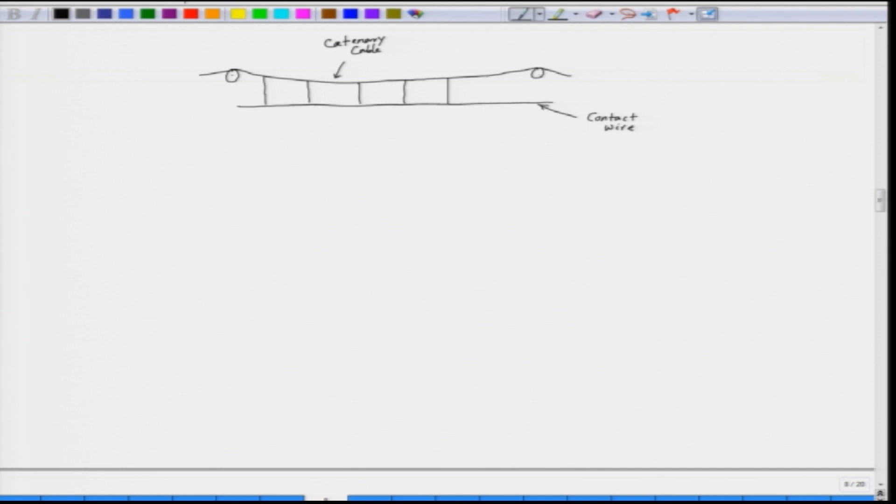So, we have the catenary cables like this, and this is the catenary line which is called the catenary cable, and then we have a contact wire with which the locomotive makes contact. This is called the contact wire. The contact wire is kept almost horizontal by the dropper wires. So, these are the dropper wires. So, we have the droppers here.

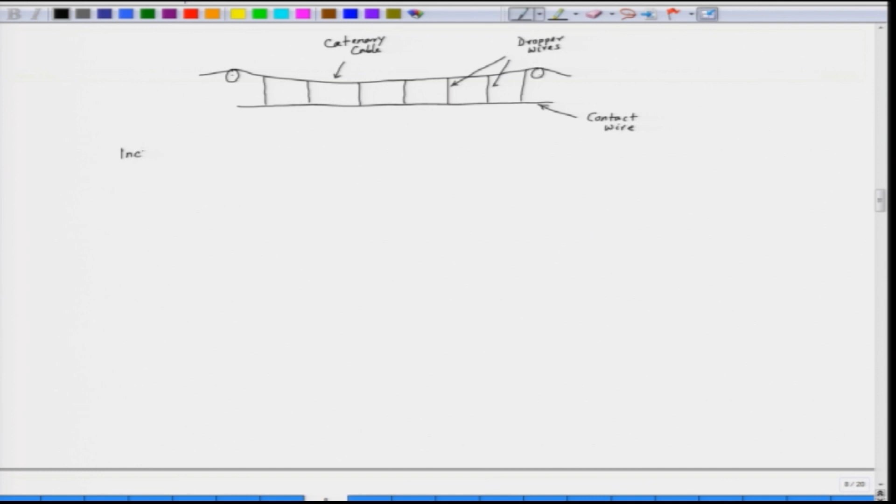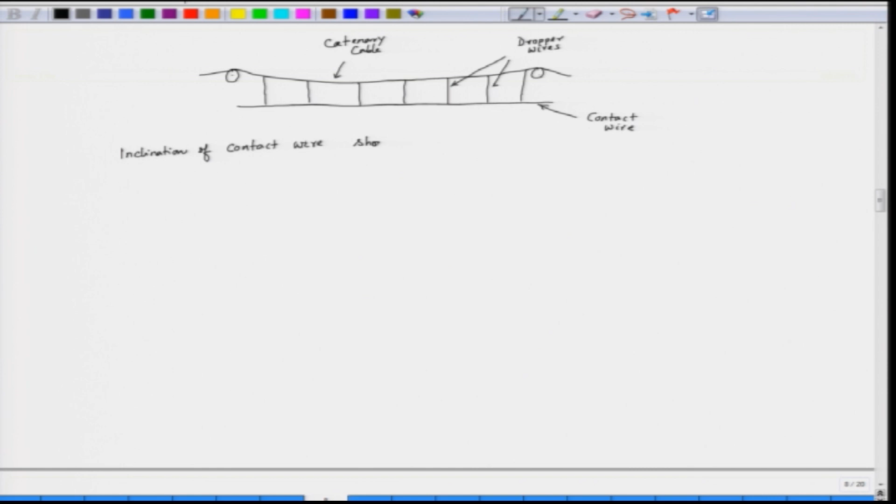And the contact wire should be horizontal, and the inclination of the contact wire should be less than 1 in 300. So, this has to be absolutely horizontal. So, the catenary wire basically gives it a mechanical support, and the contact wire is kept horizontal by dropper wires which are connected to the catenary cable.

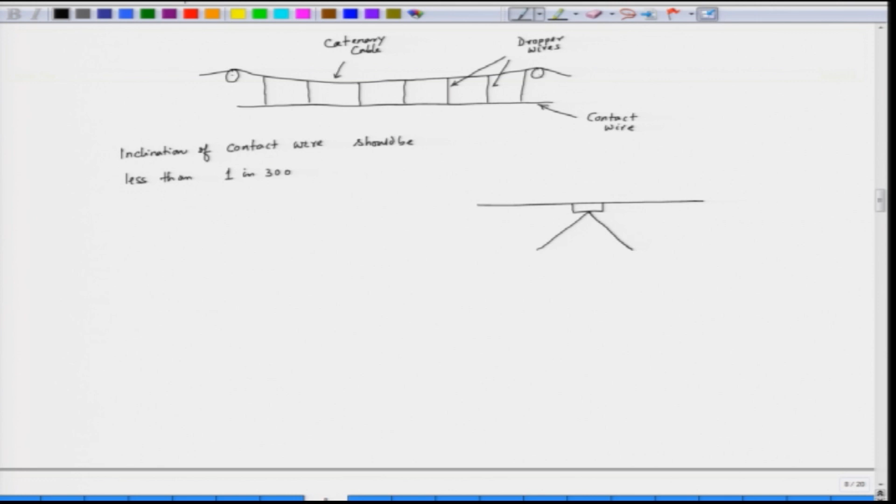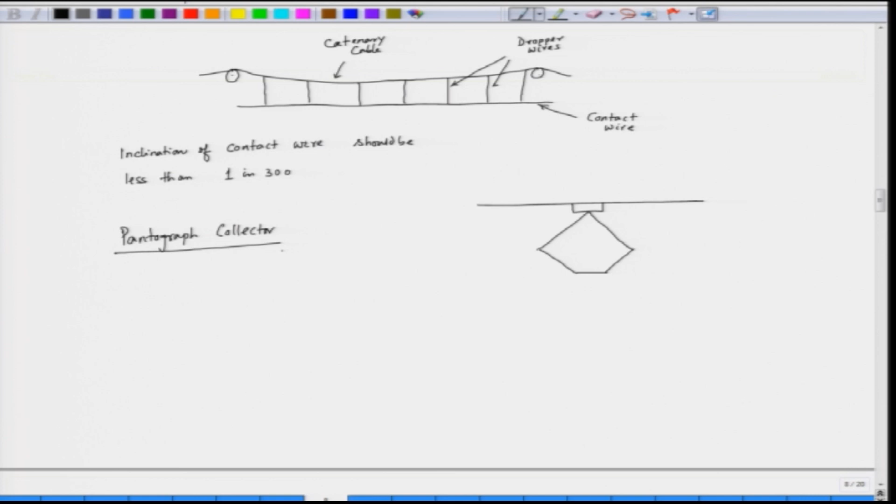Now, the train or the locomotive makes contact with the contact wire through an equipment called pantograph. So, we have a pantograph or a pantograph collector. So, this is a pantograph collector. It is something like a pentagon. This is a pantograph collector. So, this is a collector strip, and this is the contact wire.

And the contact wire is not at a particular position, it is staggered to even out the wear of the contact strips. As the train moves, the contact wire is also staggered, so that the wear of the contact strip is almost even.

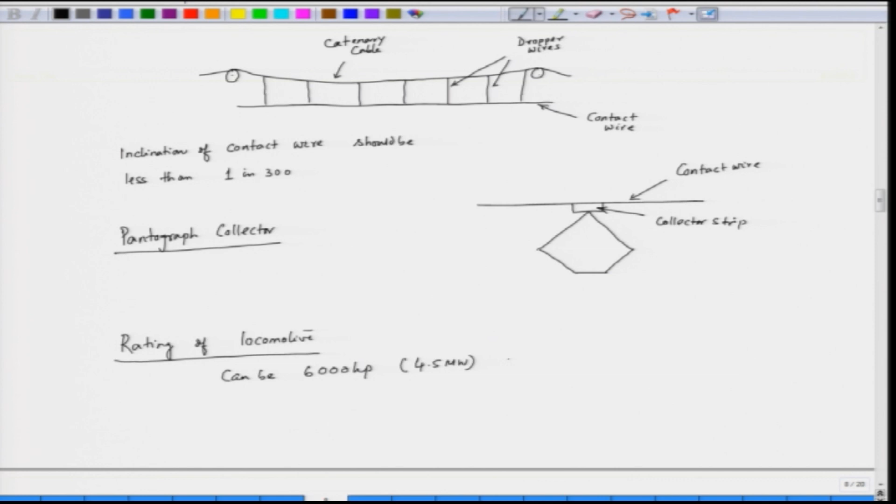So, this is how the current is collected. And when we talk about the rating of the traction drive, it can be as high as 6000 HP, which means approximately 4.5 megawatt or more. So, we are talking about a high power drive, and this power is not supplied by a single motor. This power is supplied by a combination of motors, maybe 4, 6 and so on. These motors drive the axles, which are connected to the wheels.

So, let us see how the motors drive the axles. So, we have the axles here, these are the wheels, and we have the axle, and each axle is connected to 2 wheels. These are the wheels, and they run on a predefined track. So, we have the track here on which the train runs, and the motor usually sits on the axle. So, we have the motor here, it basically sits on the axle. Each axle has got one motor,

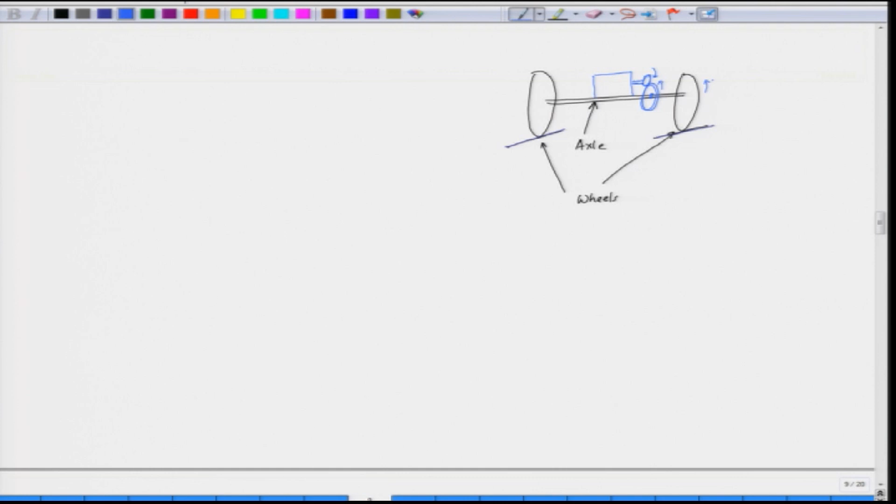and then we have a gear arrangement. We have a gear here, and then we have a gear in the axle. So, these are the fixed gears in this case. This gear is connected to the axle, and as the motor rotates, the gear also rotates, and hence the wheel rotates. So, this is the motor which is mounted on the axle, and we have the gears. The gear is driven by the motor, and the axle rotates, and hence the wheel rotates.

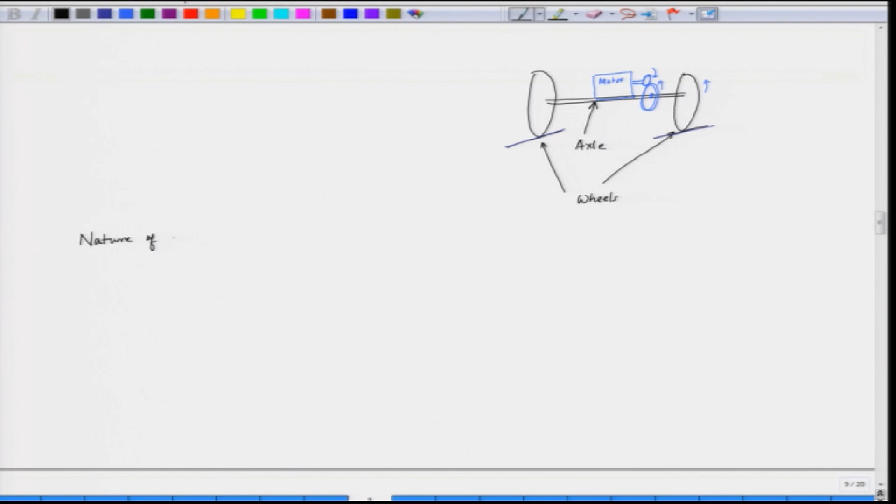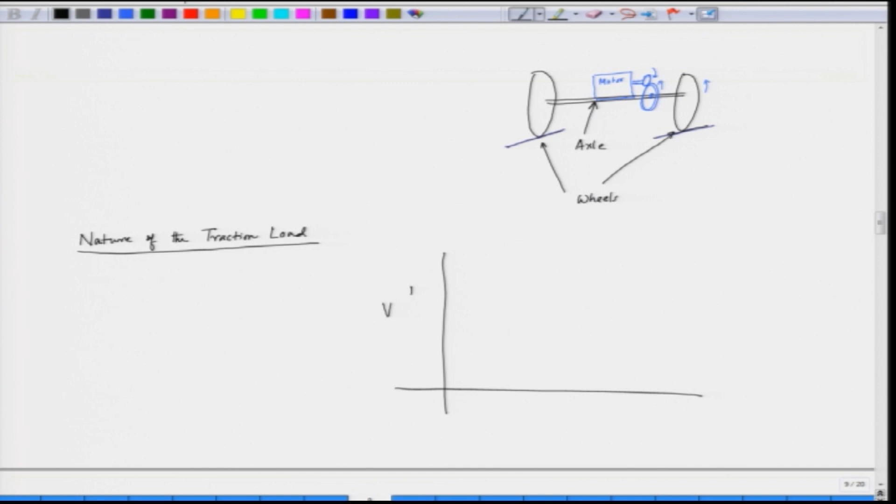So, what about the nature of the traction load? We will now discuss the nature of the traction load. Now, the traction load consists of various components. Typically, the variation of the load with speed looks like this. So, this is the speed in this case, and we have the traction load. This is called the train resistance. So, this looks like this, and we have the various components.

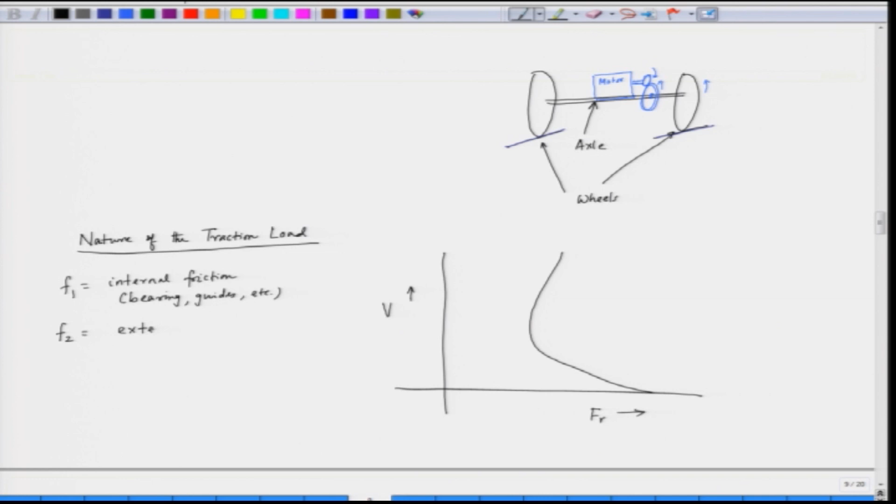F1 is called the internal friction, which is with the bearings, guides, etc. F2 is called the external friction, which is the wheel flanges and rail, and F3 is the air friction. So, the train resistance Fr is given by F1 plus F2 plus F3.

So, when the train is moving, we have internal friction. The internal friction is with bearings, etc. And we also have external friction, which is with the wheel and the track. And then we also have air friction, because the train is moving at a certain velocity and is basically facing the air. So, the air is also offering a resistance to the movement. So, primarily these are three components: the internal friction, external friction, and the air friction.

In addition to that, there is a gravitational force which may be acting if the track is having some gradient. If the track is absolutely horizontal, there is no gradient force, but sometimes when the locomotive is moving in a hilly area, there may be an up gradient or a down gradient. Depending upon the gradient of the track, there would be a gravitational force.

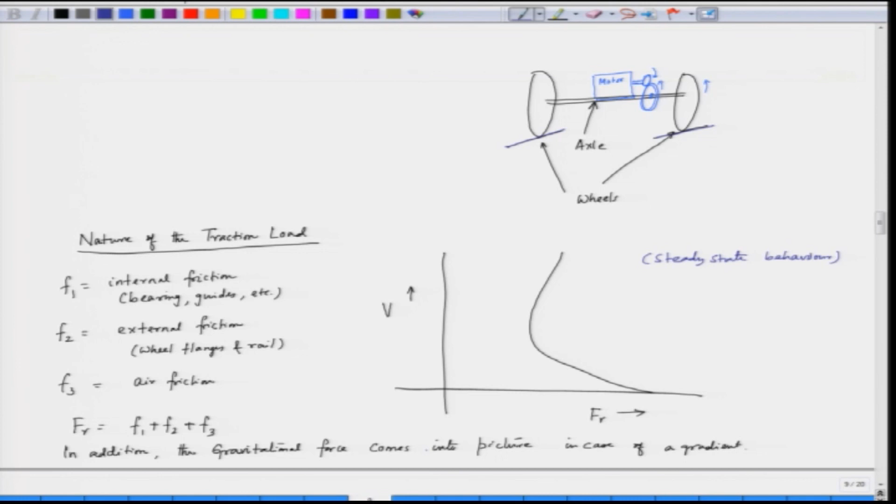Now, there is an important parameter which is associated with traction. When the wheel is running on the track, there has to be an adhesion between the track and the wheel. Unless there is adhesion, the train cannot move forward. Because there is adhesion, when the wheel is rotated by the motor, the train moves forward. The adhesion can be said in a crude word like a friction, but in electric traction we call this adhesion, and we have a parameter called coefficient of adhesion. Let us see what is coefficient of adhesion.

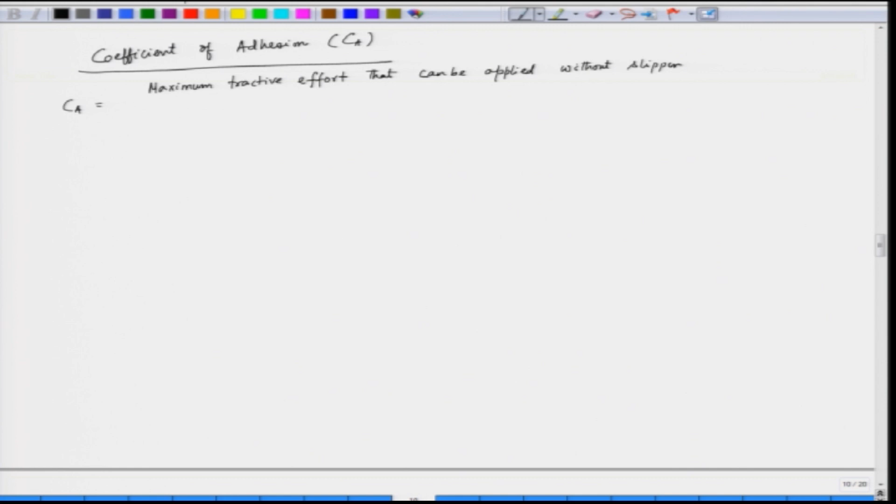So, we have coefficient of adhesion, which is called Ca. So, what is this coefficient of adhesion? The definition is the maximum tractive effort that can be applied without slipping of the wheel, divided by the weight on the driving wheel.

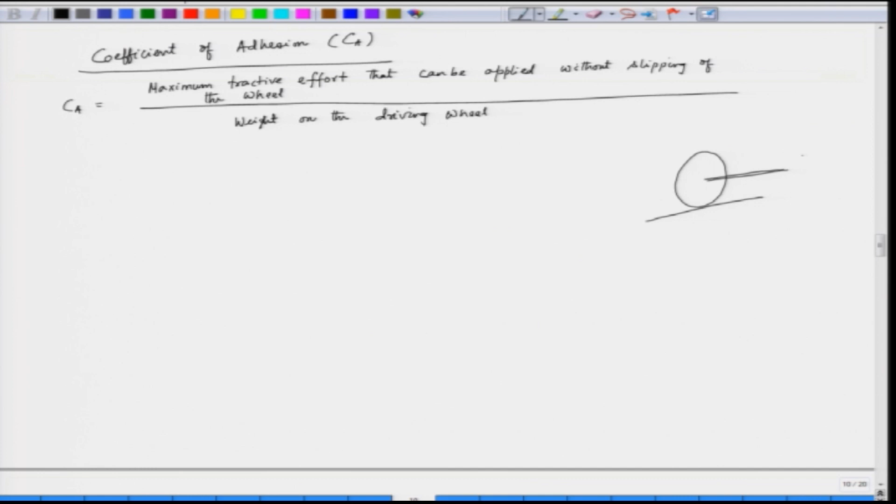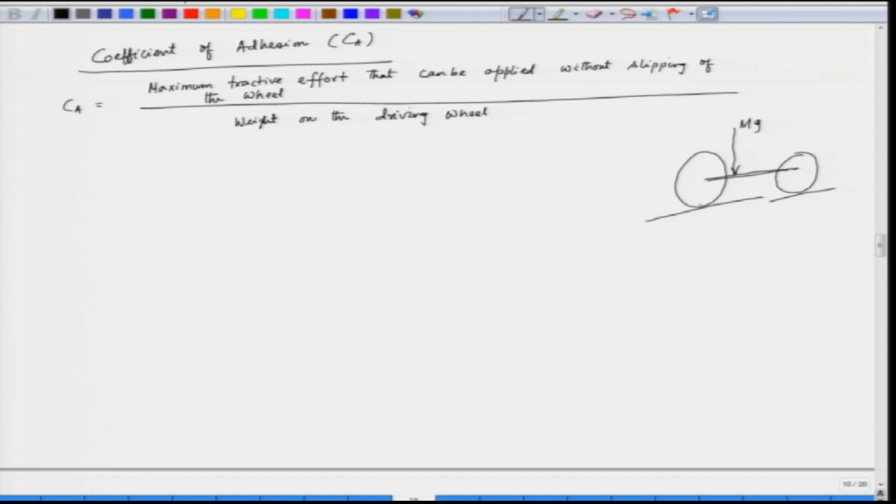So, we have the wheel which is resting on a track, and the wheel is basically connected to another wheel through an axle, on another track. So, we have some weight on this wheel. We have some mass, and m into g is the weight. This weight is distributed between these two wheels, and when the wheel is rotating, it has to move forward.

So, the definition of coefficient of adhesion is the maximum tractive effort that can be applied without slipping of the wheel. The tractive effort is the force which can be applied here without slipping of the wheel, divided by weight on the driving wheel. The tractive effort is being applied by the motor. The motor is producing a torque, and the torque by the radius of the wheel is the tractive effort. So, the tractive effort is Ft, which is the torque divided by the radius.

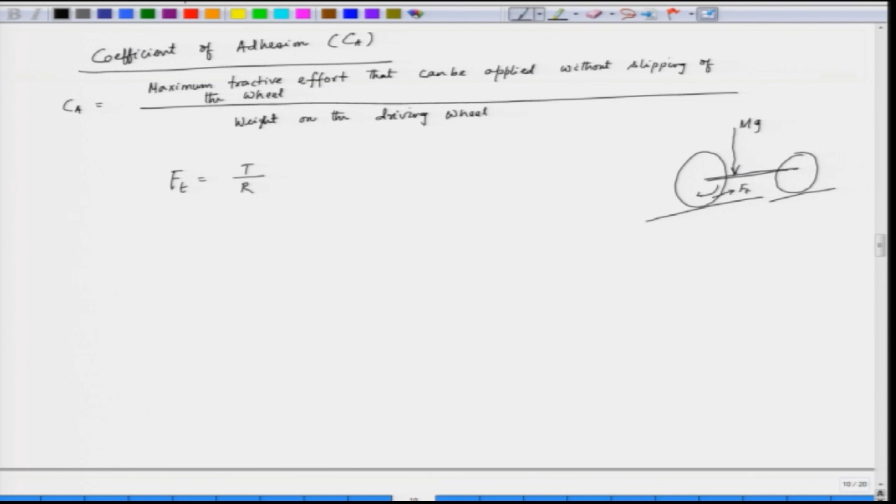So, we are applying a tractive effort Ft so that the vehicle moves forward, and if the tractive effort is more, the wheel may start slipping, and if the wheel slips on the track, there will be burning of the track, wear and tear of the track and the wheel. The wheel will be damaged, the track will also be damaged, because the wheel rotates at a high speed and it is slipping on the track. So, the track will be worn out. To prevent that, we have to ensure that the tractive effort applied is less than the permissible value, and that is decided by the coefficient of adhesion, defined here.

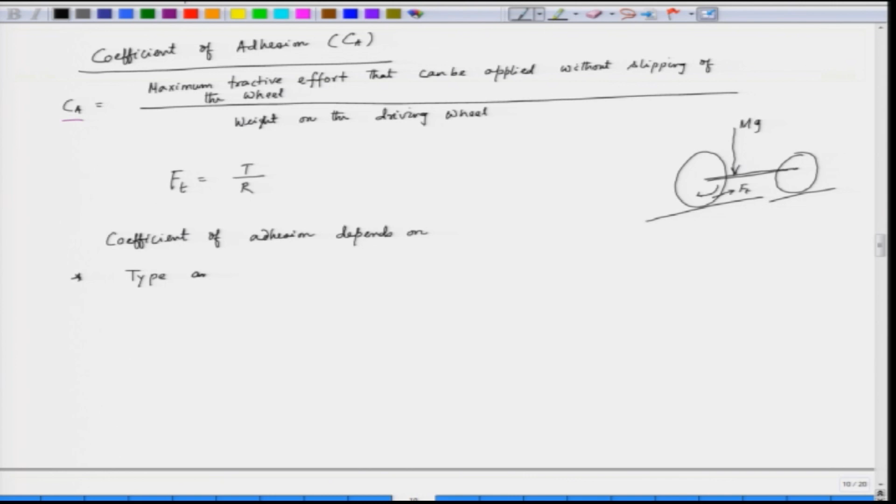Now, this depends upon various parameters. The coefficient of adhesion depends on, number 1, type and condition of surfaces at the point of contact. So, the coefficient of adhesion depends on the type and condition of surfaces at the point of contact. So, we have contact here and contact here.

So, it means whether there is presence of oil, grease; these will reduce the coefficient of adhesion. The presence of water on the track will also reduce the coefficient of adhesion. The presence of snow will also reduce it, and so on. So, if we are running the train on a rainy day, the coefficient of adhesion will be less. If the track has got oil or grease, it becomes slippery. The coefficient of adhesion, which is something very close to the coefficient of friction, also becomes less. So, the condition of the track and the wheel determine the coefficient of adhesion. Furthermore, the coefficient of adhesion also depends on the vehicle speed.

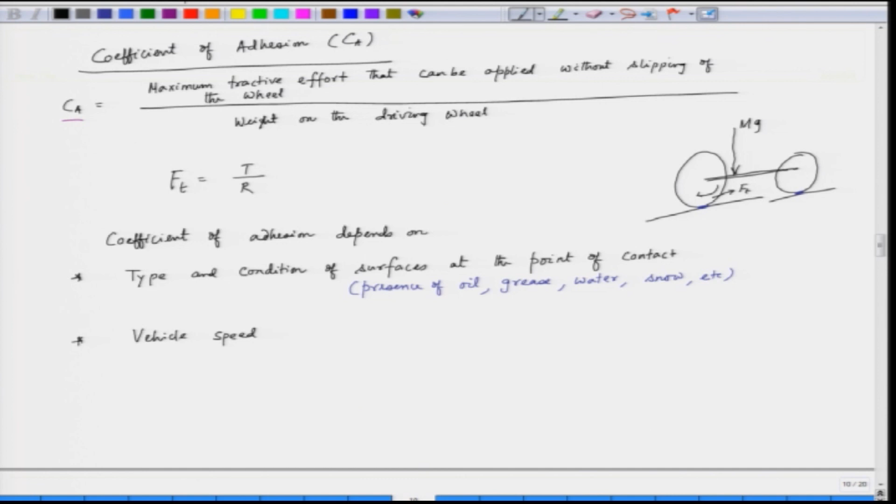Vehicle speed. If the vehicle speed is high, the coefficient of adhesion is less. If the vehicle speed is low, the coefficient of adhesion is more. So, if we plot a graph between the vehicle speed, V is the speed of the vehicle, versus the coefficient of adhesion, it will basically look like this. So, at high speed the coefficient of adhesion is less, and at low speed the coefficient of adhesion is more.

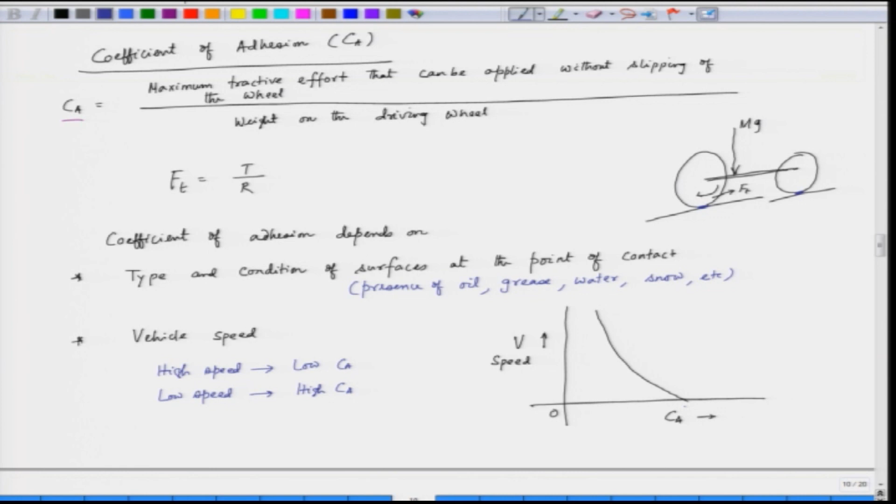So, high speed indicates low CA, low speed indicates relatively higher CA. So, if the speed is low, the coefficient of adhesion is high. So, this is how the coefficient of adhesion varies with the vehicle speed. It also depends on other parameters like the nature of the torque speed characteristic.

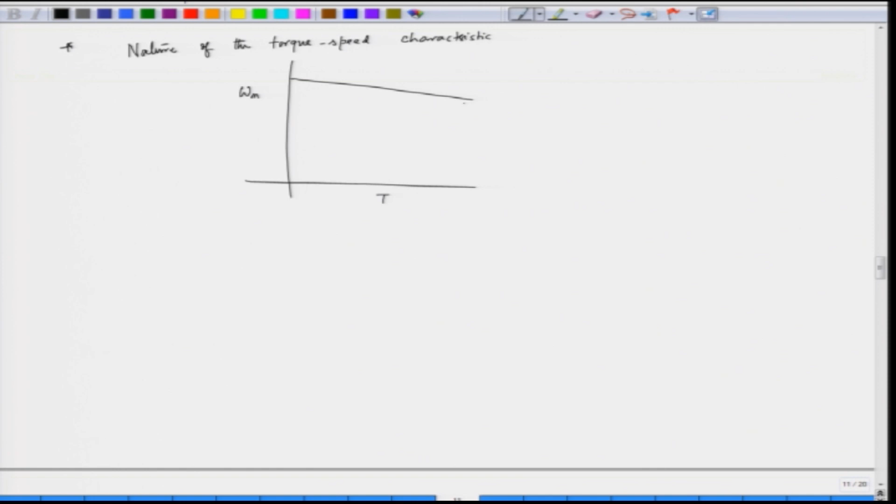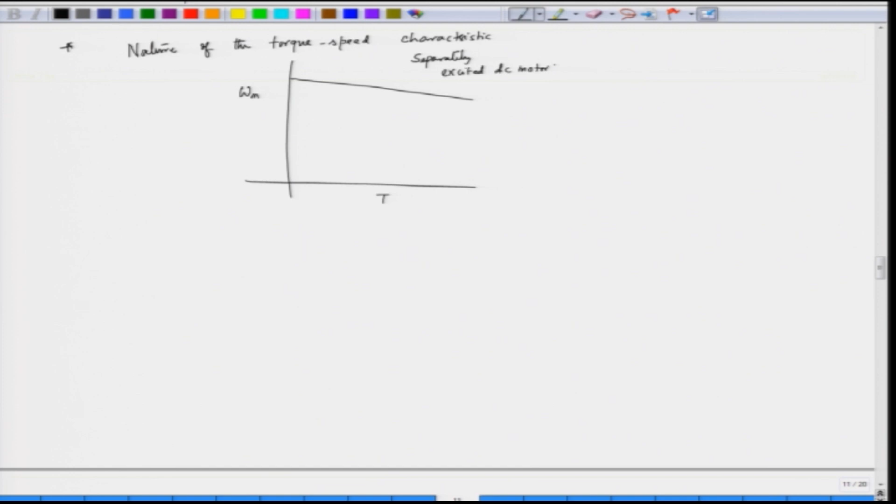So, let us say that we have two types of motor. One is a motor where the speed regulation is very small, so the speed is only dropping gradually with torque. This is basically a separately excited DC motor. And we also have another motor where the speed torque characteristic is not that stiff, something like this. We have a series motor, let us say, series DC motor.

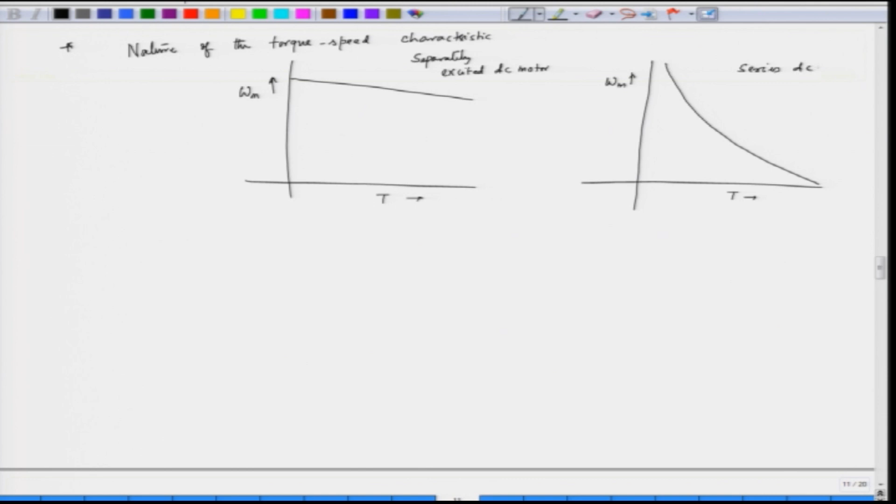Now, in the first case, when we have a separately excited DC motor, if the wheel slips, the torque reduces very quickly. So, when the torque reduces quickly, the wheel regains the grip on the track. So, this will have a higher coefficient of adhesion. So, here for a small change in the speed, when there is a wheel slip, the speed increases, but the torque change is quite significant.

When there is a wheel slip here, suppose it was operating at this point and the wheel is slipping, the speed will increase from point A to point B. When it increases to point B, the torque decreases from Ta to Tb. When the torque decreases, the tractive effort also decreases. So, the wheel regains its hold on the track and the wheel slippage is prevented. So, this has got higher coefficient of adhesion.

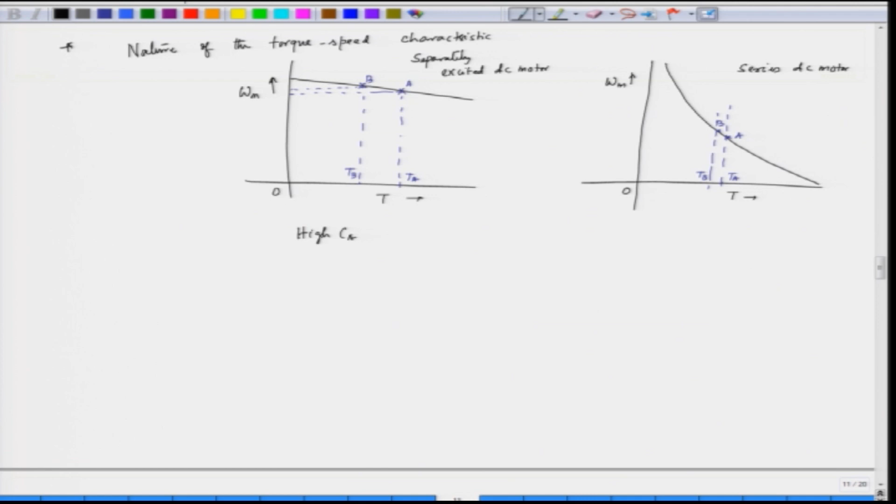But on the other hand, if we have a series motor and there is a wheel slippage, the speed increases from, let us say, A to B, but the decrease in the torque is not that high compared to a shunt or separately excited DC motor. For a series motor, the coefficient of adhesion is less. So, this has got high Ca and this will lead to a low Ca if you go for a DC series motor as a traction motor.

And we have another factor which also determines Ca, which is the motor connection. If the motors are connected in series, series connection will lead to a low CA, and parallel connection will lead to higher CA.

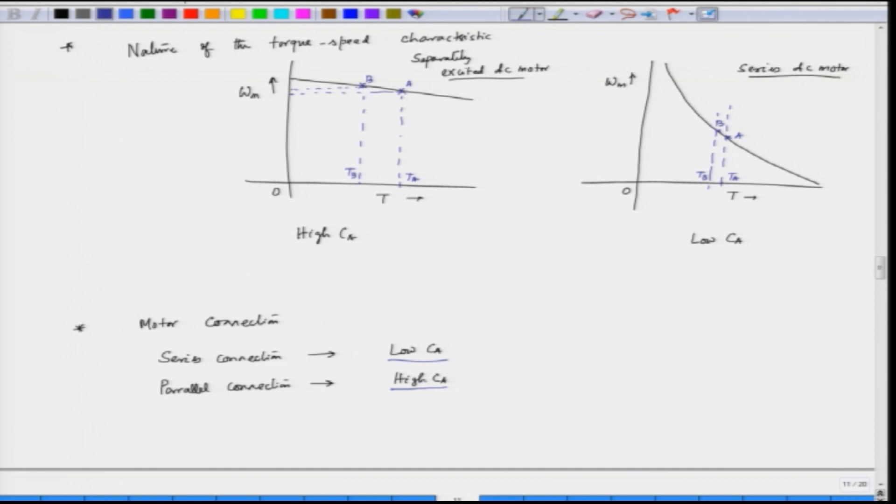Because when the motors are in series, if there is a wheel slip, the back EMF will increase and the current reduces for all the motors. The motors corresponding to a wheel which was not slipping also will have a reduced torque. So, the series connection will have a low CA because all motors are affected, but in a parallel connection only the motor which is slipping will have reduced torque. So, we have relatively higher tractive effort and a higher CA here. So, this is about the coefficient of adhesion.

Now, we will understand the duty cycle of the traction drive. When a locomotive is moving from one station to the other station, how does the speed change, how does the torque change? We will be discussing that right now. So, we have the duty cycle of traction drive.

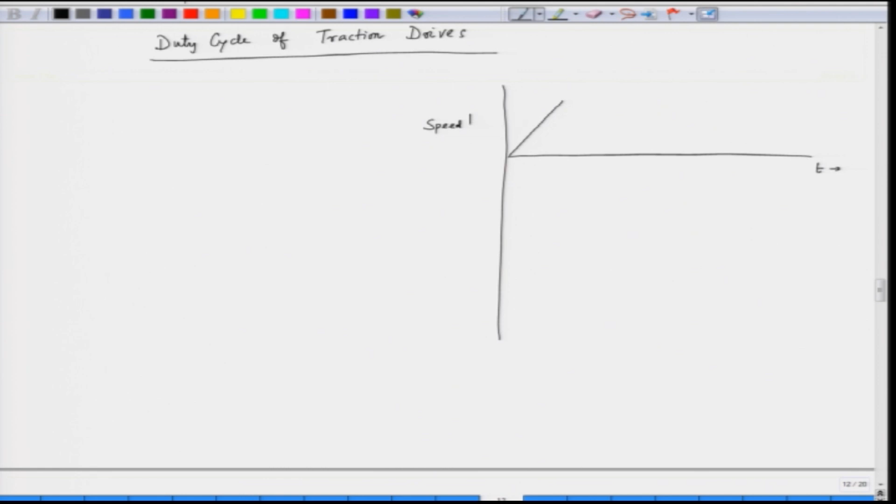Let us say that a locomotive is moving from one station to the other station. It starts, it accelerates, it reaches the maximum speed, then before it reaches the next station, it has to brake and come to a standstill. So, the typical speed variation is as follows, plotted against time. Initially the speed is changing here, we have a linear change in the speed from 0 onwards, the x axis is the time axis, and this is the constant torque.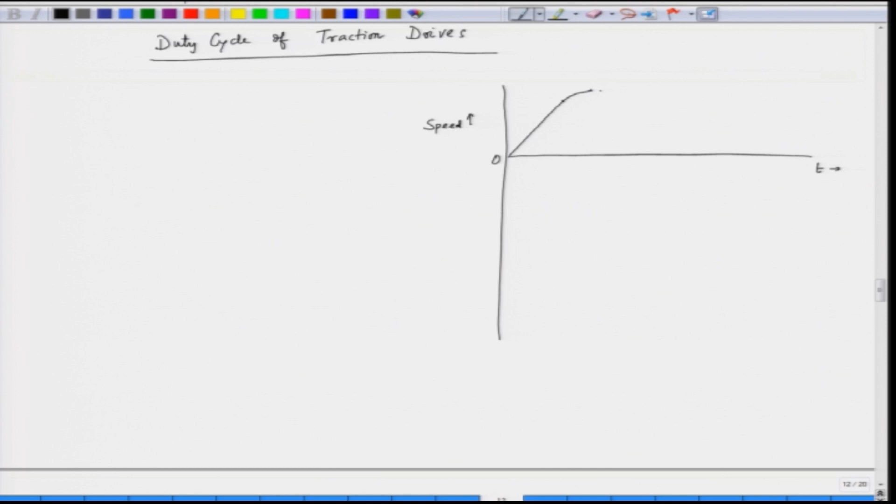Then we have constant power, then we have the free running period, then before the stop the motor is switched off. So, we have the coasting period and then we have the braking period. So, it looks something like a trapezoid. So, the first part where the torque is almost constant, this is called constant torque

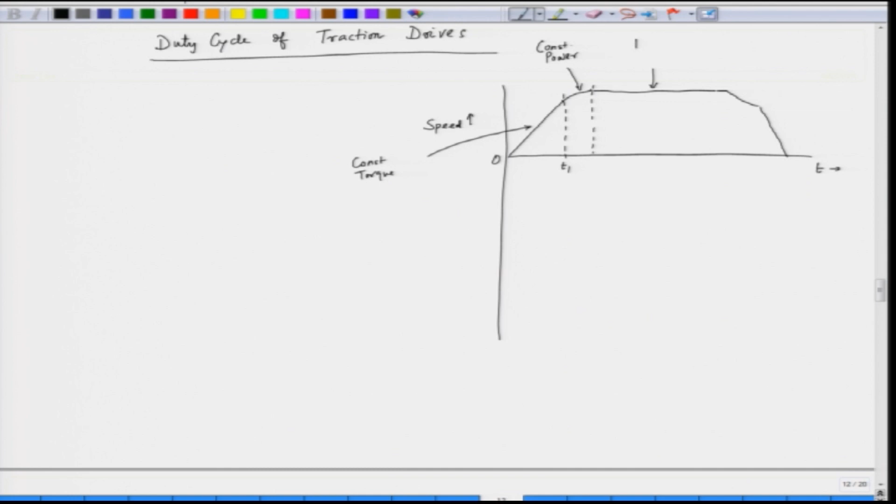up to this point T1, let us say, and from T1 to T2 the power remains constant. So, we call this the constant power region. So, the speed has reached the maximum possible value and then it runs freely, and we call this a free running period, free running here.

And then we have something called the coasting period. Coasting means the motor is switched off, the power is switched off. So, this is also called the power off period. And then we have the braking period.

So, 0 to T1 is a constant torque, T1 to T2 is a constant power, T2 to T3 is a free running period, T3 to T4 is the coasting period, and T4 to T5 is the braking period. So, if we see the torque variation here, how does the torque change?

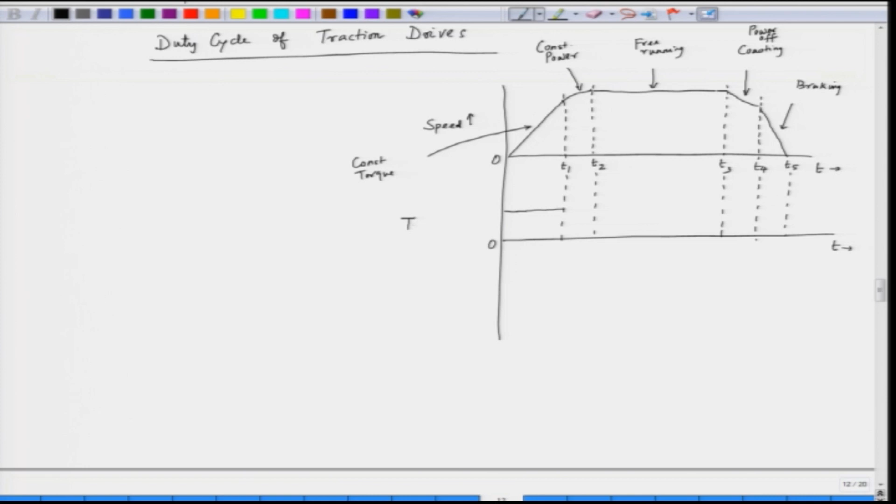From 0 to T1, the torque almost remains constant at the maximum possible value. So, this is the torque. And then from T1 to T2, torque decreases, but the power remains constant. And here we have reached the maximum possible speed, then we only supply the frictional torque and the air resistance, which is very small,

and from T3 to T4 the motor is switched off. So, we have absolutely 0 torque, and then from T4 to T5 the motor is braked. So, we apply a negative torque for the braking. So, the torque changes as follows. Now, if we see the power variation with respect to time, let us see how the power changes with time.

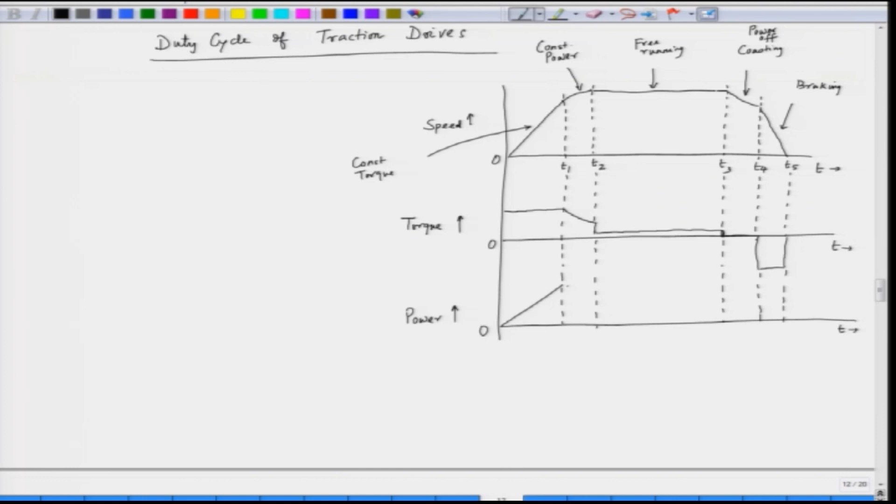So, initially the motor is being powered. So, the power gradually increases and we reach the maximum possible power, that is the rated power, and then we operate at maximum power, and then during the free running period the power decreases to a minimum value, and then when the motor is switched off the power is 0 here, and then when we are braking the torque is negative.

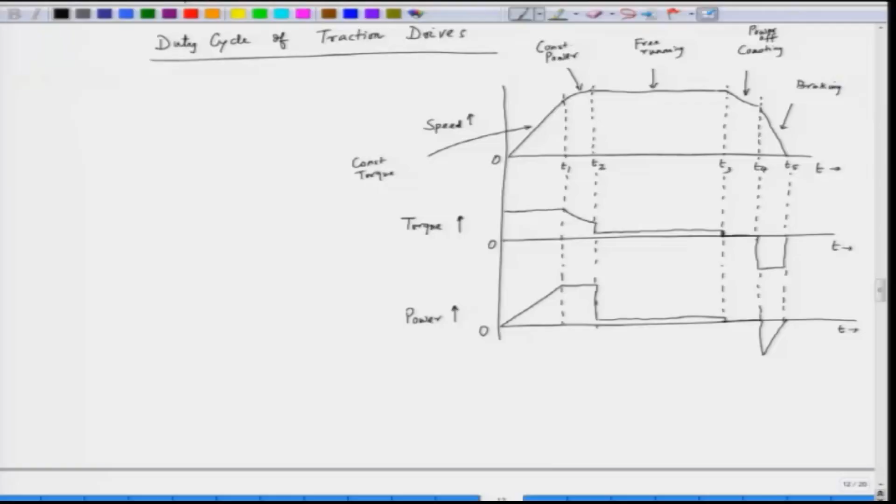So, power also becomes negative because the power is fed back to the supply, and when the speed gradually comes down to 0 the power becomes equal to 0. So, this is the variation of the speed, the torque and the power for the motor, but we are assuming that there is no gravitational force. So, these plots are actually for a level track.

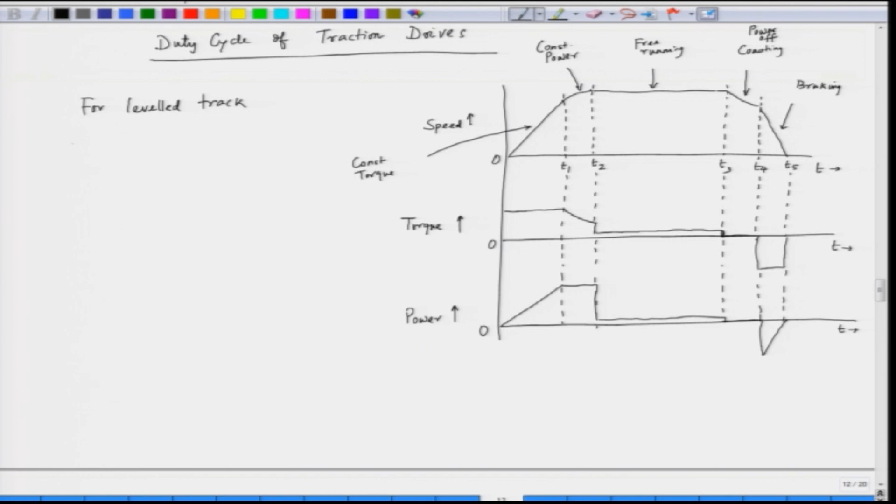When the track is level, there is no gradient, the track is absolutely horizontal. So, these are the plots for a level track. It means the track is absolutely horizontal. Horizontal track.

Now, if we want to find out the distance covered, the distance covered is basically the area under this curve. So, if you want to find out the distance traveled by the train, we have to find out the area under this curve. So, let us see how we find out the distance.

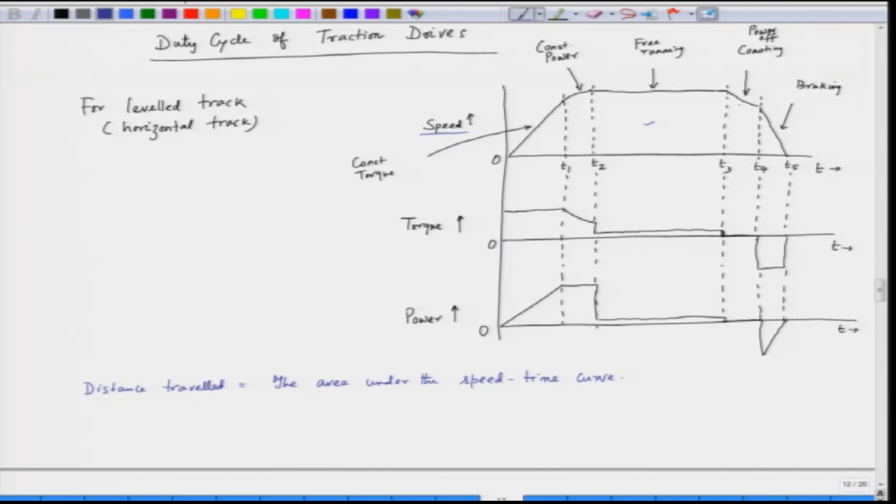So, distance travelled is equal to the area under the speed time curve. So, if we take the speed time curve, which is this curve, and if we calculate the area under this curve, we get the distance travelled.

Now, we will try to do the calculation of the drive rating and energy consumption. Calculation of drive rating and energy consumption. So, we will redraw our speed versus time diagram.

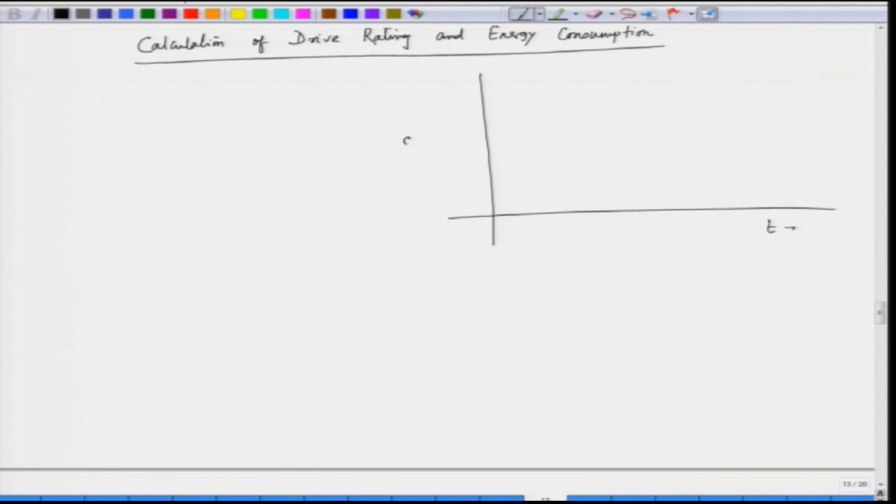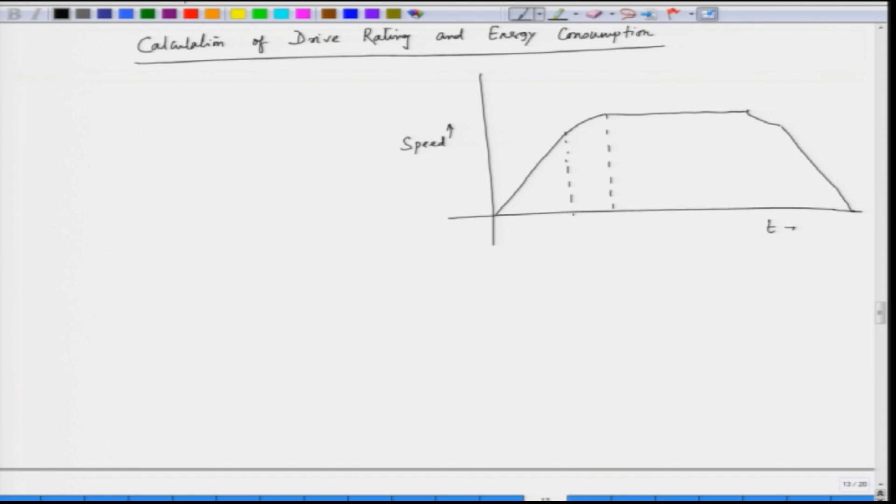This is our speed on the y axis. So, we have constant torque, constant power, free running period, coasting period and braking period. So, these are the various periods we have, and we will first find out the distance covered, and also we will find out the drive rating.

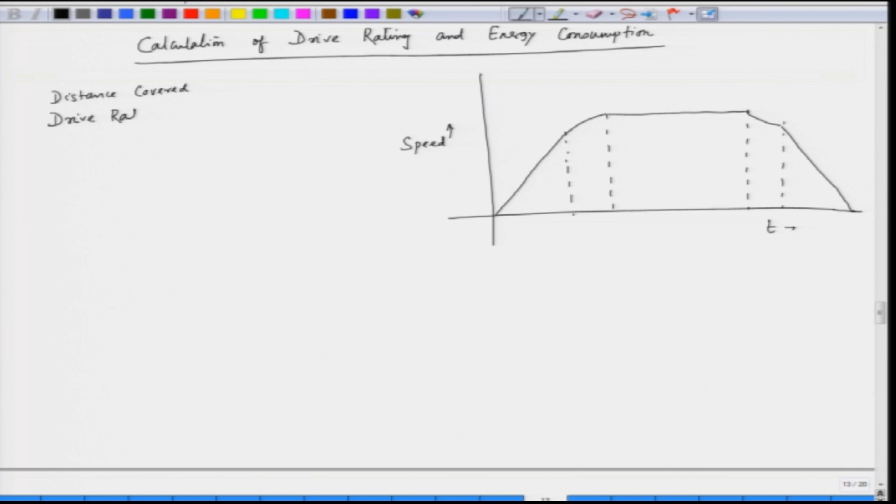So, we have understood how a train moves from one station to the other station. It goes through the various modes like constant torque, constant power, free running period, coasting and braking. So, the subsequent calculation of the distance and the drive rating we will take up in the next lecture.